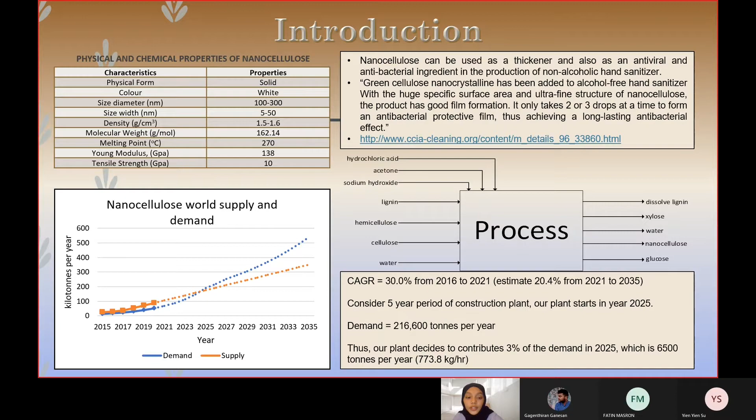Our plant decided to contribute 3% from the demand in 2025, which is 6,500 tonnes per year or 773.8 kilogram per hour. The industrial location is an important thing to determine patterns of manufacturing because it can affect the efficiency and profitability of production.

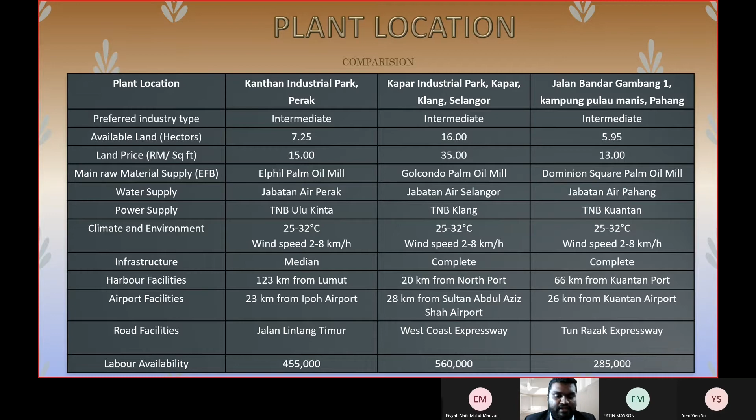Here are some suggestions for the plant location: Kanthan Industrial Park Perak, Kapar Industrial Park Kapar Selangor, and also Jalan Bandar Gambang, Kampung Pulau Manis, Pahang. We did a weightage analysis, and based on the weightage evaluation, Kapar Industrial Park Kapar Klang Selangor has been chosen as the plant location.

For the economic analysis, we found out that the minimum acceptable rate of return is 0.25. The net return is 4.77 million. The net present value is 64.27 million. And the net discounted cash flow rate of return, DCFRR, is 0.79, which is greater than 0.25, our minimum acceptable rate of return. So our plan is financially feasible.

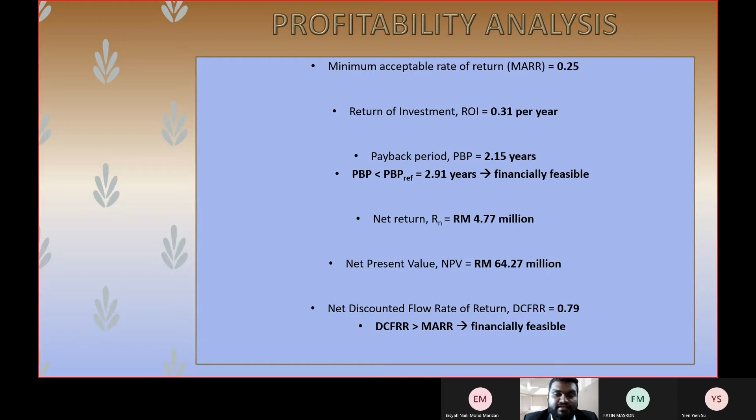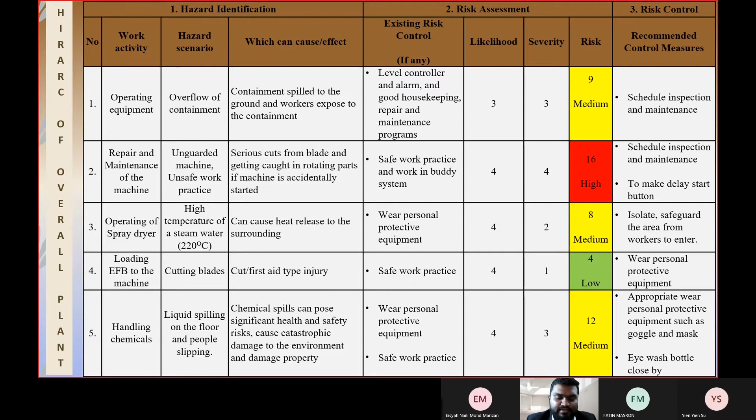For safety and hazard identification, we referred to a few acts and regulations, namely the Environment Quality Act 1974 Act 127, the Occupational Safety and Health Act 1994, and also the Factory and Machinery Act 1967. Based on these acts, we analyzed the chemical hazard, biological hazard, mechanical hazard, health, electrical and electromagnetic hazard found in our plant to perform the hierarchy of controls.

Next is the list of improvements to our project. First, we updated the process flow diagram of the wastewater treatment plant, in which the chlorination tank is removed from the PFD. We included the reference in section 5.1 and 5.2 and the set point value in the chapter on process control. We also included the steam and cooling water for heater and cooler in both the PFD and P&ID diagram. We included information on the minimum price of our main product in the chapter on economic analysis.

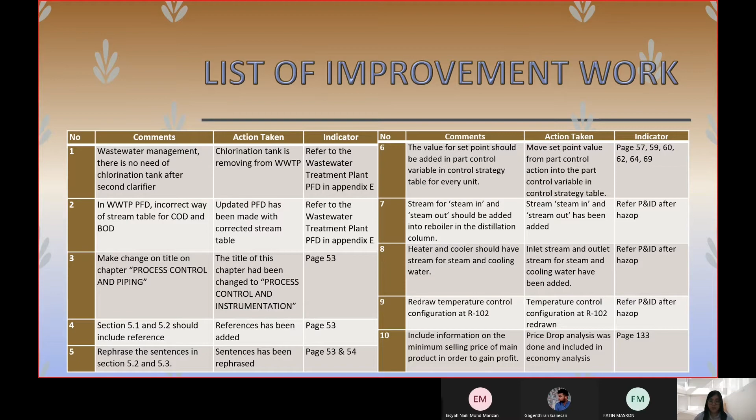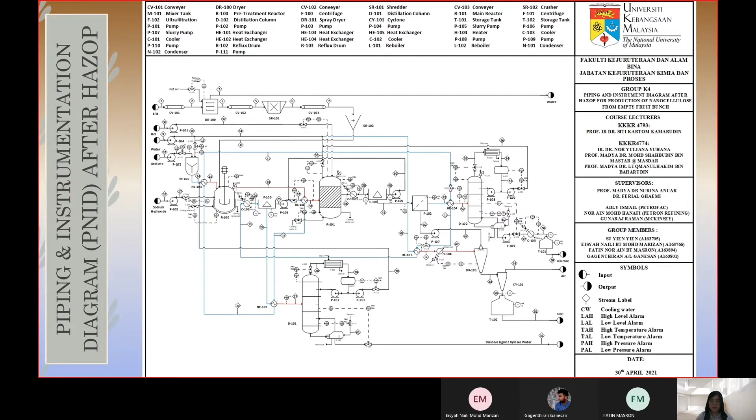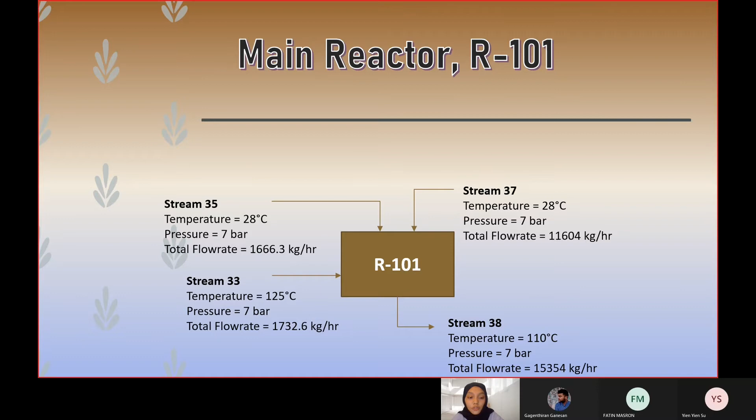Next, for the main reactor design: this reactor uses an acid hydrolysis process where water, cellulose, and hydrochloric acid enter the reactor, which takes place at 110 degrees Celsius and 7 bar, forming nanocellulose and glucose. This is the design calculation for the main reactor.

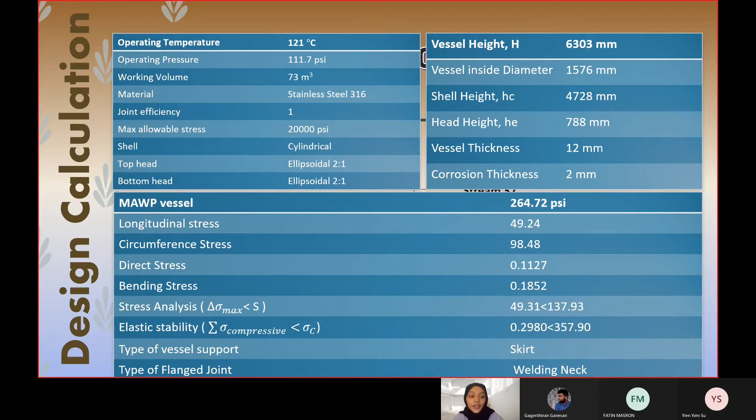The operating temperature of the reactor is 121 degrees Celsius and the operating pressure is 111.7 psi, and the working volume is 73 meter cube. The material used is stainless steel 316, and the vessel height is 6.3 meter, with the vessel inside diameter 1.5 meter. The type of vessel support is skirt, and the type of flange joint is welding neck. This is the mechanical design for the main reactor.

Next is the detailed design of the distillation column D102. For this distillation column, due to the difference in boiling point, hydrochloric acid will be vaporized as the top product and recycled back to the main reactor R101.

The efficiency is 58.50%. Actual number of stages is 15 stages, and the height is 10.637 meters, with an inner diameter of 1.395 meters.

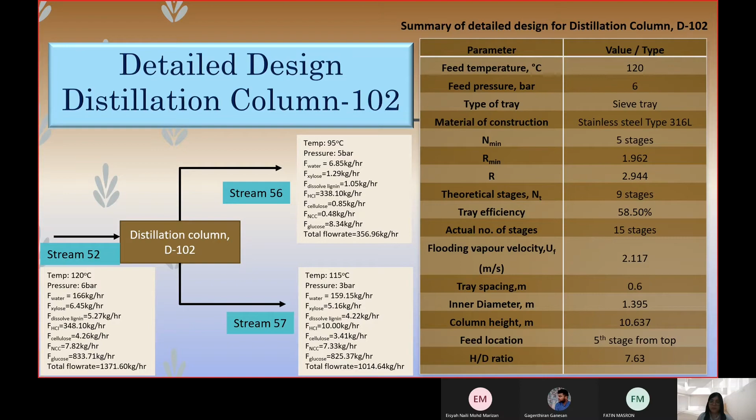Next is the mechanical design calculation for this column. Stainless steel type 316L is chosen as the construction material due to the corrosivity of the hydrochloric acid. An Ellipsoidal 2:1 head is chosen for the design with 0.349 meter, and a shell height of 9.940 meter is calculated.

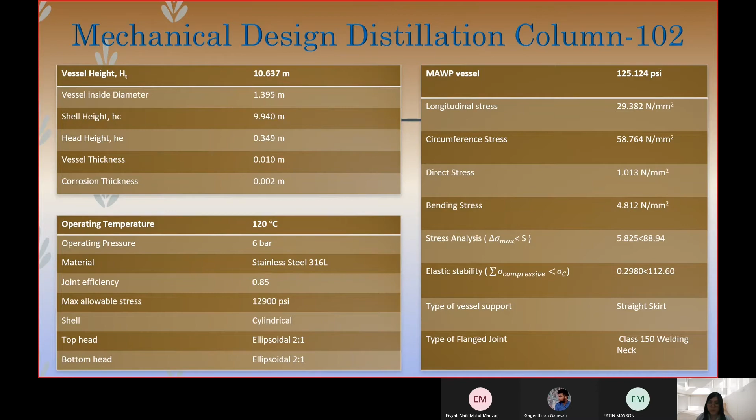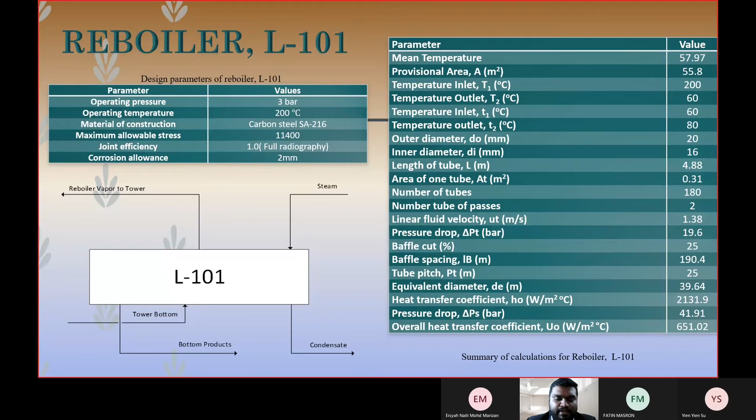For the detailed design of reboiler L101, a kettle reboiler is used to heat up the distillate from distillation column D101, which consists of xylose, dissolved lignin, acetone, and sodium hydroxide. The distillate will be heated up to 200 degrees Celsius, which vaporizes all the components in the distillate completely through this stream into the distillation column 101.

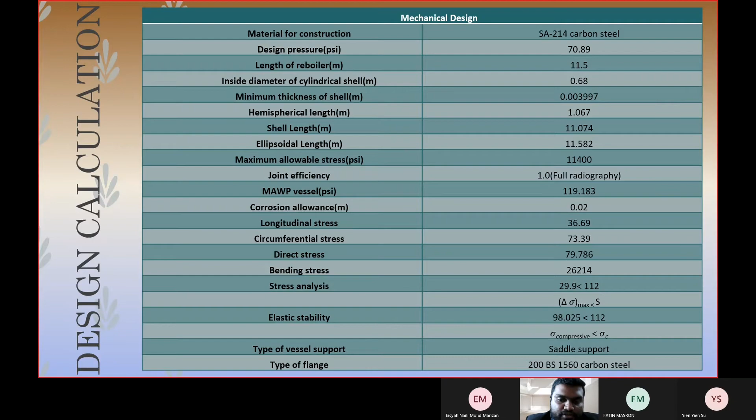Next is mixing tank M101, where acetone and water will mix at the operating temperature of 28 degrees Celsius and pressure of 5 bar. The shell of the mixing tank is cylindrical. The top head and bottom head are torispherical, and the material of the mixing tank is stainless steel type 304L.

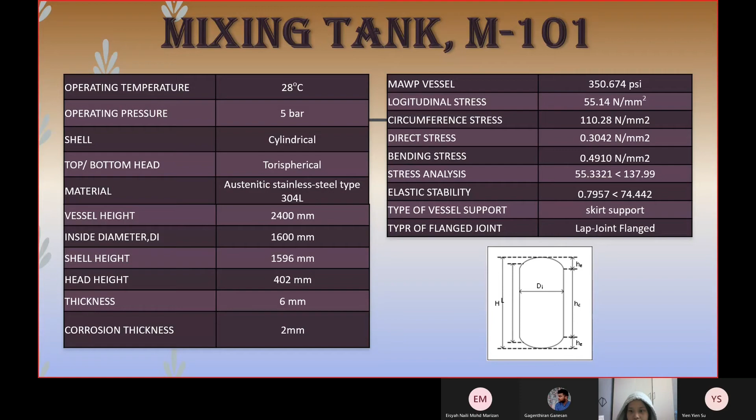The vessel height is 2,400 millimeters. The shell height is 1,596 millimeters, and the head height is 402 millimeters. The thickness of the mixing tank is 6 millimeters, and the corrosion thickness is 2 millimeters.

Next is plant layout. The economical construction and efficient operation of the process depends on how well the plant and equipment specified on the process flow sheet is laid out. Site layout is the effective arrangement for the industrial facilities, buildings, and equipment in the plant.

In our plant, we made sure we had these elements, namely assembly area, administration office, car park, canteen, clinic, control room, final product storage, parking area, power supply, QA and R&D lab, wastewater treatment plant, and warehouse. We also considered the wind direction when making this plant layout.

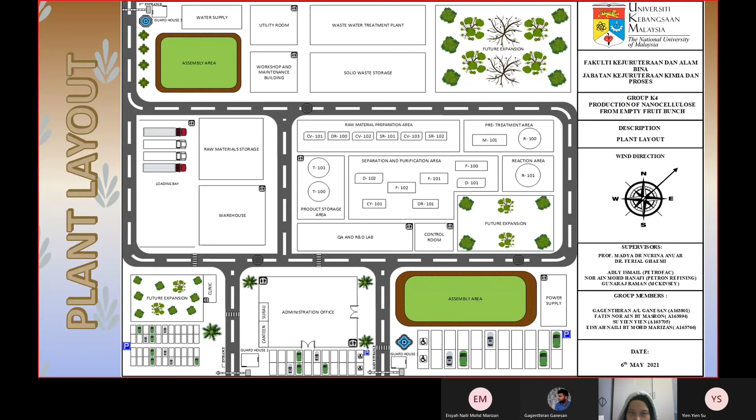Next is waste management. Before we calculate the COD, BOD and SS, first we assume that the density of water is 937.5 kg per meter cube, and then the BOD value is 0.3 COD.

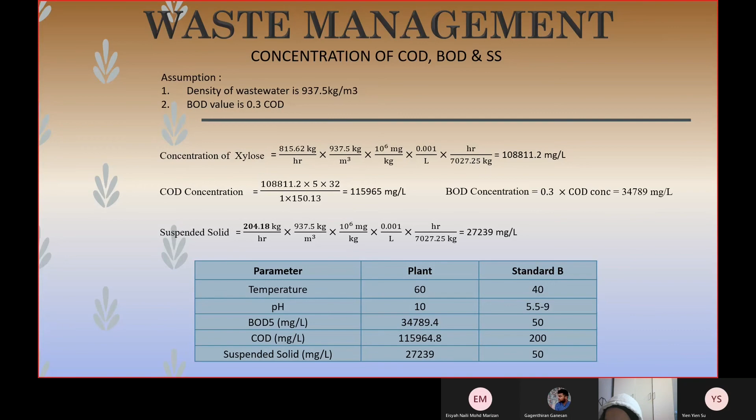The concentration of xylose we get is 108,811.2 mg per liter. BOD concentration is 34,789 mg per liter, and the suspended solid is 27,239 mg per liter. And then the PFD of the wastewater treatment.

So for the conclusion, our process produces nanocellulose with empty fruit bunch as our raw material. EFB will undergo two processes: pre-treatment process and acid hydrolysis process.

Our site will be located at Kapar Industrial Park, Kelang, Selangor. The plant capacity for our nanocellulose is 6,500 tonnes per year, or 773.8 kg per hour.

The waste management in our plant is wastewater treatment only. Several legal requirement acts related to our production are EQA 1974, OSHA 1994, and also FMA 1967.